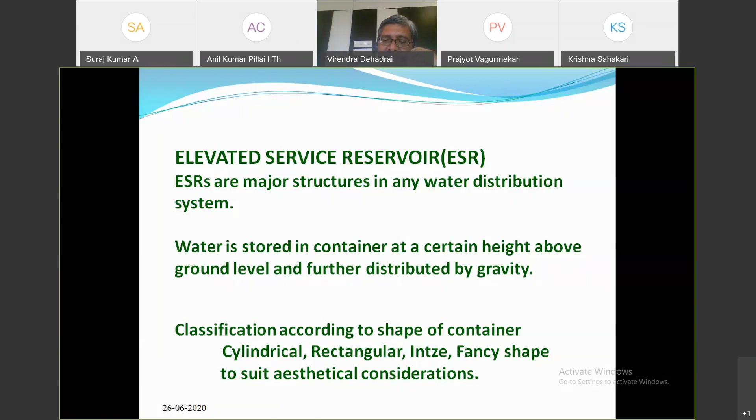The classification of the ESR is done mostly on the shape of the container, and the shapes can be cylindrical, rectangular, Intze type shape, which is a geometrically very efficient shape to dissipate hydrostatic pressures, and fancy shaped ESRs, which are there to suit aesthetical considerations.

ESR has three distinct elements: the container to store water, the staging to support the container at the required elevation, and the foundation to transfer the load to the ground. Of course, each element demands different analysis and design considerations to suit its functional requirement.

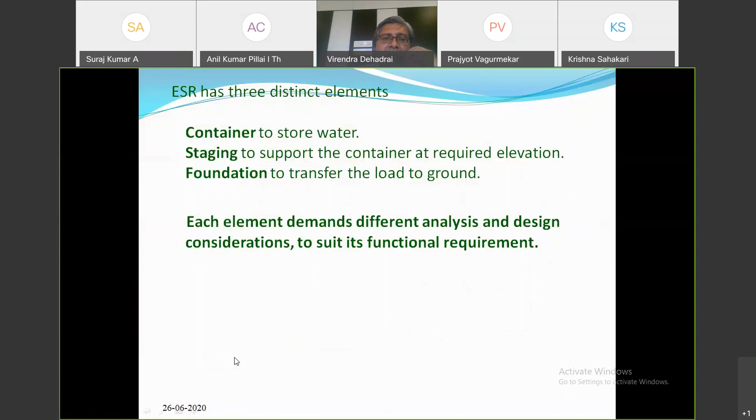The container is usually cylindrical or Intze type and will have the following members. For cylindrical tanks, a cylindrical wall connected at top by a roof slab and at bottom by a base slab. In Intze type, it's a roof dome with a cylindrical wall, conical shell, base beam or slab, bottom beam, and ring beams.

The members of cylindrical and Intze type containers can be classified as thin shells subjected to axisymmetric load due to water inside the container. Hence they are predominantly subjected to in-plane forces and can be analyzed by membrane theory. But this membrane theory creates discontinuity at the joints, and the compatibility at the joints can be achieved by applying bending theory of shells near joints. This continuity analysis has been very well explained in the textbook of Jain and Jaikrishna, and in a series of papers by Dr. Arya in ICJ.

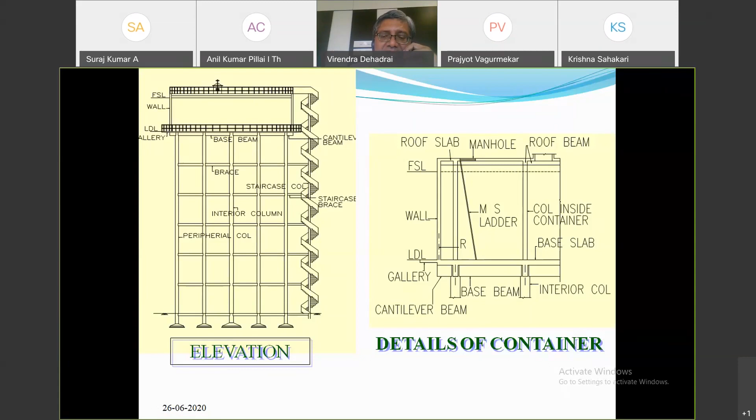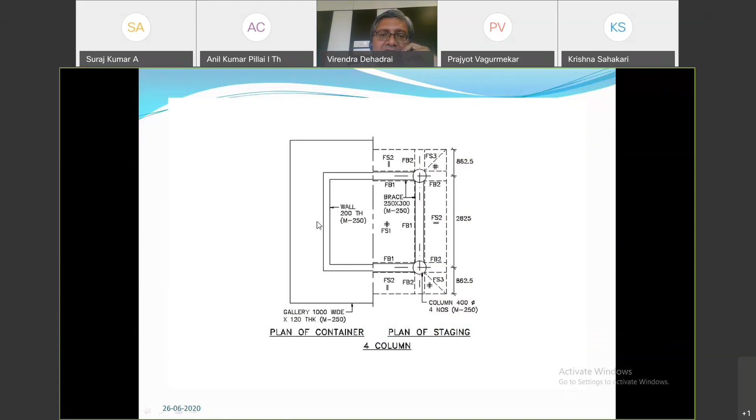This is typical 4 column ESR, and container can be square or circular, spanning on these 4 columns. Then this is 5 column configuration. Then 9 column configuration, wherein you will have container resting on a cantilever beam.

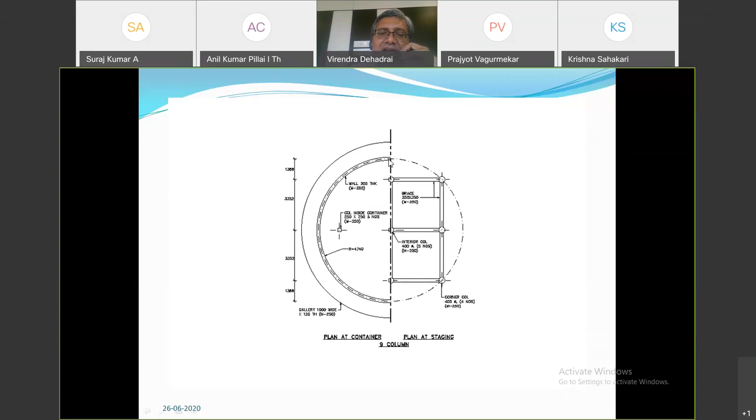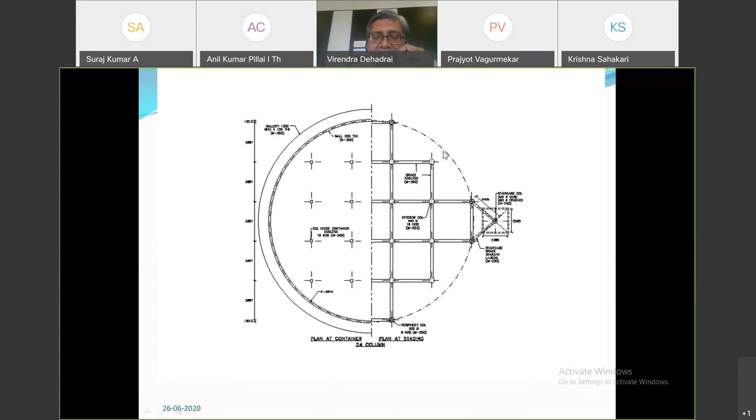This is 12 column configuration, 21 column configuration, 24 column configuration. Here also there will be cantilevers on which the cylinder will rest. Then 37 column configuration and 51 column configuration, and you can go on adding the panels to suit the construction.

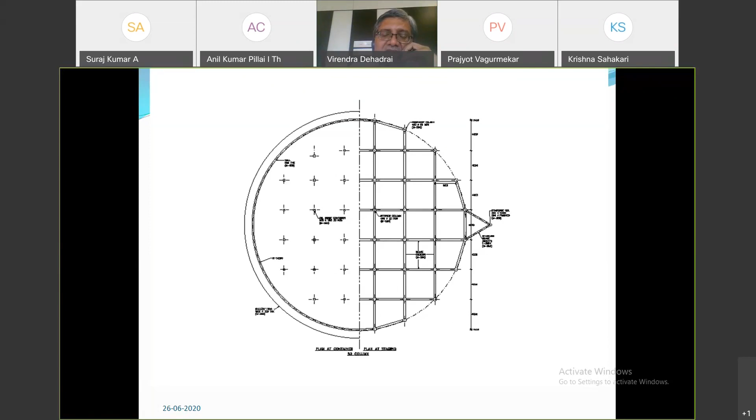So this has become one of the most popular type of ESRs, at least in Maharashtra, because the construction is much more simpler and the formwork requirement is considerably less as compared to the shell elements or Intze type of ESRs.

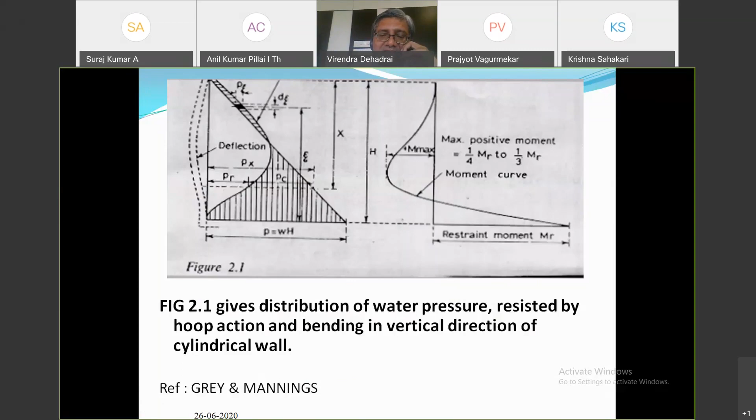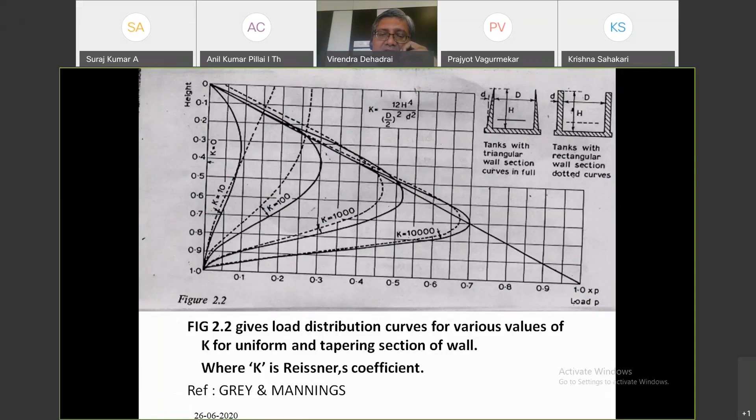And this is as given by, as already considered by Dr. R.K. Ingre, the tanks with triangular sections and uniform sections. The curves are available for the hoop in the section.

More economy in the design can be achieved using finite element method or finite strip method. Finite element method is well known and well established. And for the axisymmetric configuration of the ESRs, because of axisymmetric geometry and axisymmetric loads, we can use axisymmetric shell elements.

Wherein the wall is assumed hinged at bottom and top, and the axisymmetric water load is applied, results in the form of hoop force and bending moments in the wall can be found out, and the reaction at top and bottom hinge transferred to roof and bottom slab respectively.

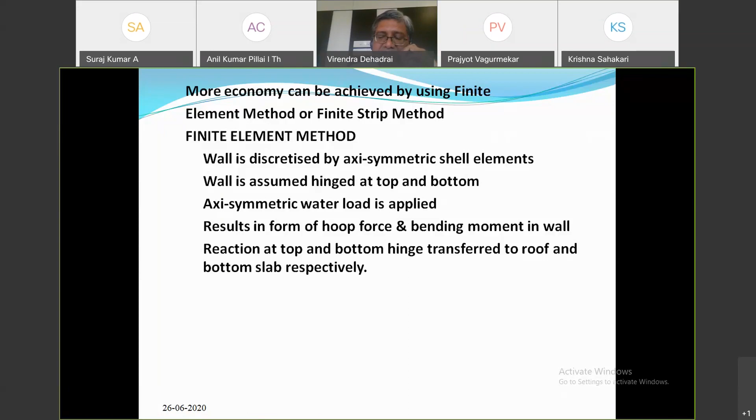This is the typical section. I am not really aware of any professional software which gives the axisymmetric shell element, but students can always find it in a very good book on finite element programming by Hinton and Owen.

There is another method called finite strip method, wherein the container is discretized by circular rings of unit height and subjected to hoop force due to water, to get the hoop force and bending moment.

The details, this method, because of the advent of new softwares, this is not popular, but for very complicated structures, still this can be used. And you can get the reference of this method in the book by Y.K. Cheung.

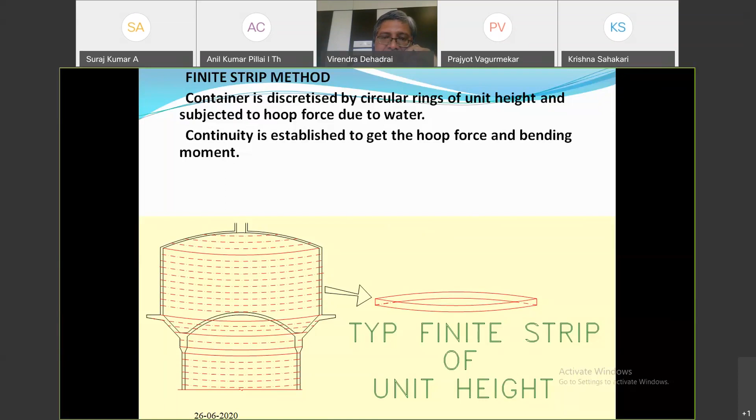As already told by Dr. R.K. Ingre, one of the most powerful methods for design engineers for analysis of axisymmetric containers is the analysis by BEF, or beams on elastic foundation analogy. And in addition to that, or improvisation on that, is the frame analogy method, which is still more suitable for design engineers.

Behavior of cylindrical wall can be modeled by considering the axisymmetric beam element resting on elastic foundation, whose stiffness is given by K is equal to Et upon R square, where E is the elastic modulus for the wall section, t is the thickness of wall, and R is the radius of the wall.

This continuous elastic foundation system can be replaced by a discrete system of tank wall divided into number of vertical beam elements whose connecting nodes are supported by lateral pin-ended struts. These are the beam elements whose moments are released at both ends. And the area and the length of these struts can be found out by the formula, which we will come to afterwards. But if we keep the length of these struts same, then only area of these struts needs to be changed, and that becomes easier. And also for design engineers, it is easier to deal with beam elements rather than the spring elements.

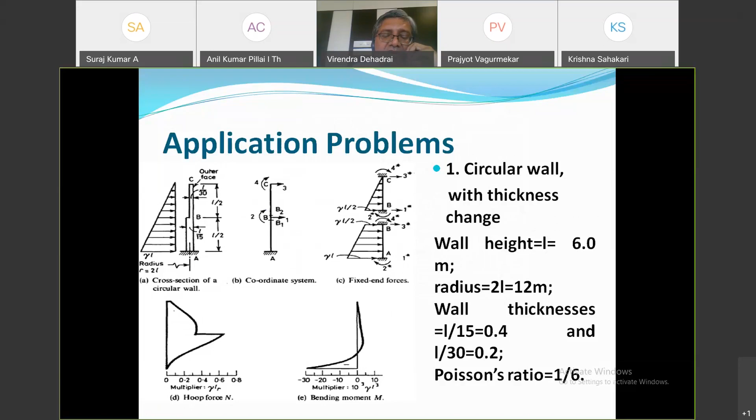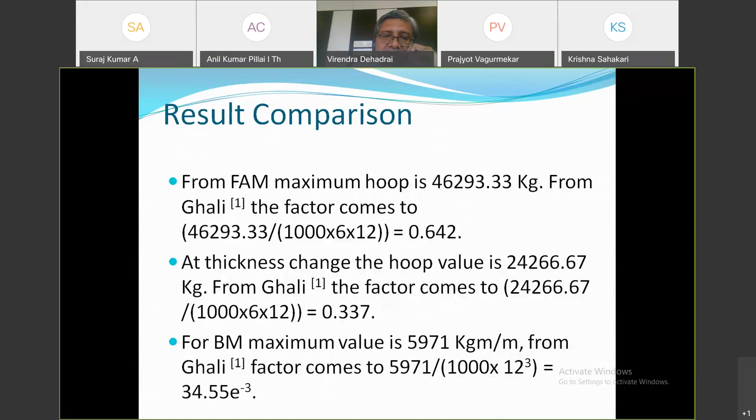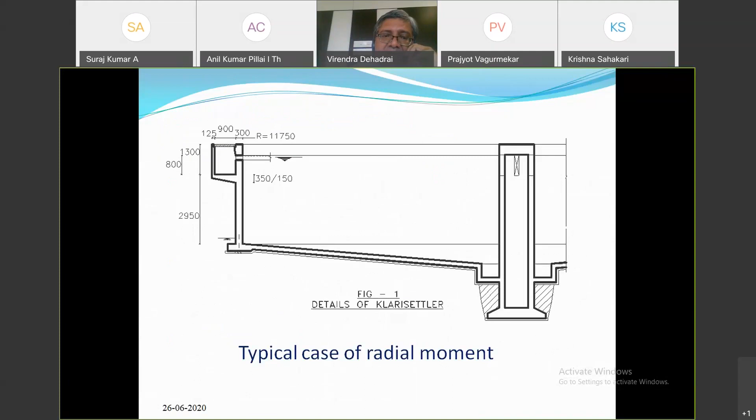Give me a few moments.

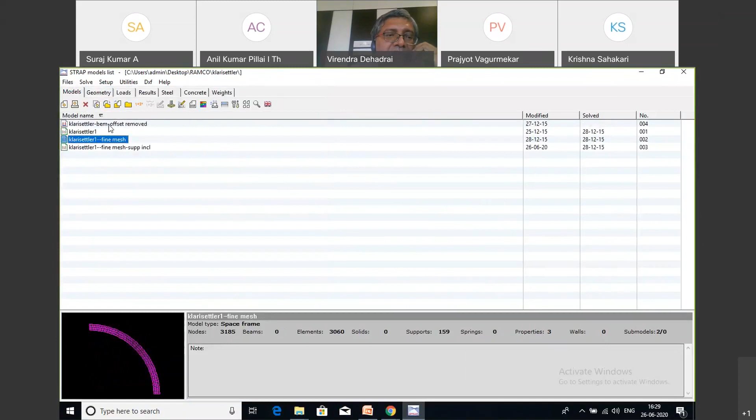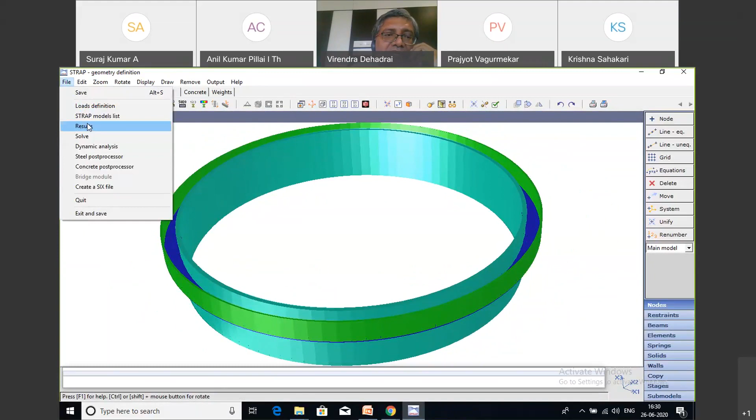So this is the 3D model of the structure, and because of the axisymmetry, we can reduce this to only a quadrant and do better analysis by considering only the quadrant of the structure like this. Only a quadrant. Now, here, because of symmetry, what you have to do is to provide restraint conditions so that symmetry is achieved. And the easiest way to do the restraint system is to consider this is x1 direction, this is x2 direction, and perpendicular to screen in upward direction is the x3 direction.

So to consider a symmetry at this plane, x1 displacement is possible, because if on one side of symmetry there is 10 mm displacement, then on the other side 10 mm displacement is possible. So x1 need not be restrained. Then x2, this horizontal direction movement. To achieve the symmetry, if this x2 is say 5 centimeter, x2 here cannot be minus 5 centimeter because of compatibility. So you have to restrain the movement in x2 direction. x3 direction is possible because if the movement is top 10 mm, then movement on the other side of symmetry of 10 mm is possible.

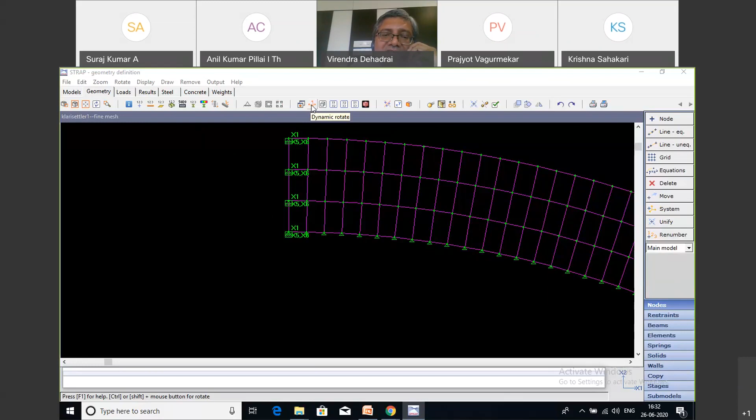Now, if we consider the moment about x1 direction like this, this moment is not possible, because by symmetry, if this is x moment, this will be minus x moment. In short, this will be fixed for this type of moment condition. So if you do this type of constraint system, we can simulate the full geometry by considering only the part geometry. And instead of doing all these things, what you can simply do is to provide a FEM model where this beam element is of unit thickness of wall thickness, and these struts you can see here.

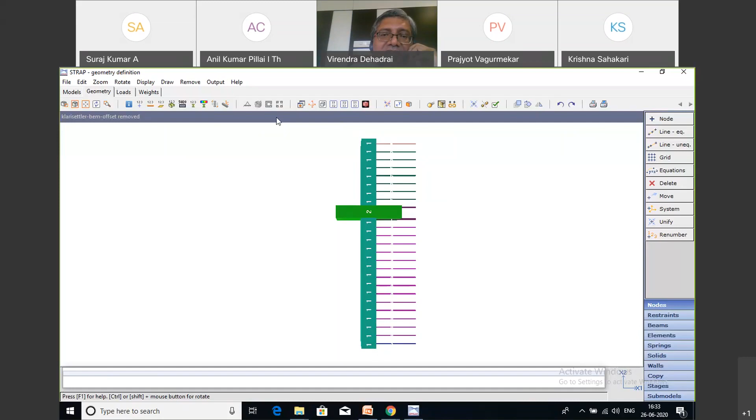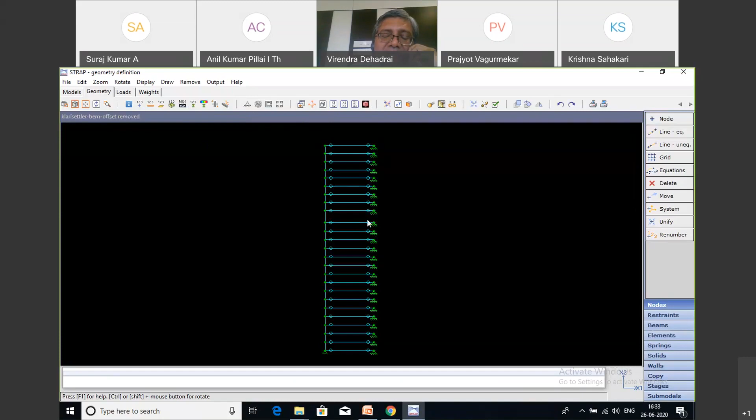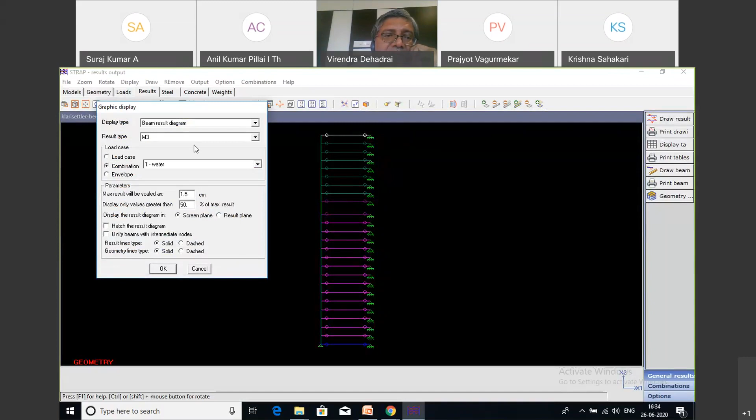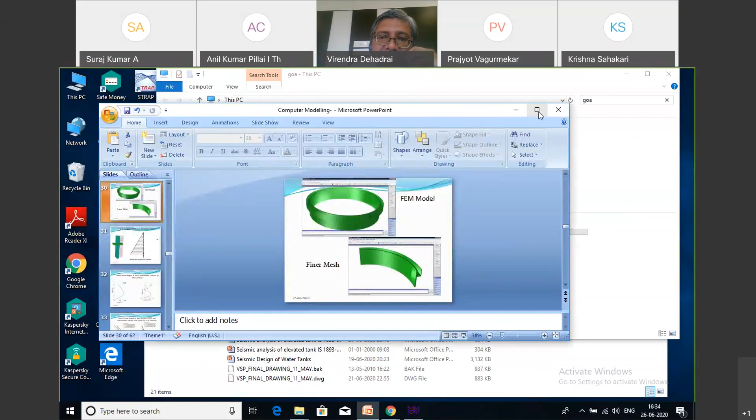For the unit strip, if you solve it, you can straight away get the bending moment in the wall this way. And the hoop in the wall can be found by the expression hoop is equal to Et upon R. I will show the calculation of hoop. From the displacement, you can calculate the hoop by this equation: Et upon R into displacement will give you the hoop in the wall.

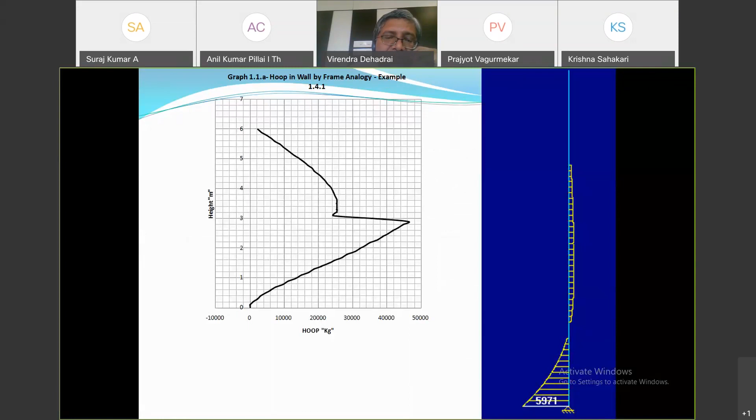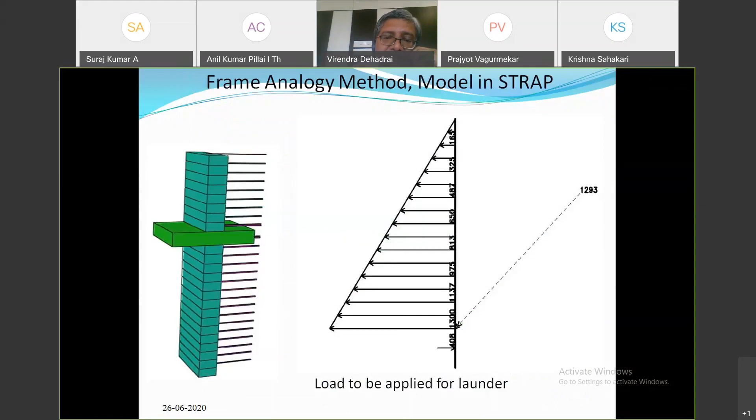So this is a very simple method for analysis of any type of axisymmetric container with a simple plane frame analysis package. These are the results which are already discussed. So I will urge all engineers, design engineers and students to use this very simple method, which can be employed by simple frame element software, which will give you the analysis of any complicated axisymmetric container.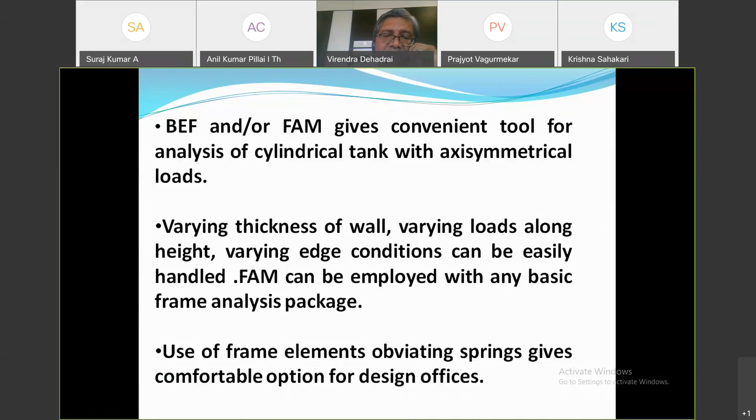Now this rectangular type of container will have the following members: roof slabs and beams, rectangular wall panels bounded by vertical beams, slab and base beams. Size in plan is usually kept to 3 to 4.5 meters from the view of construction ease, and depth of water from 3 to 5 meters. Roof slab and base slab panels are considered as rectangular interior panels subjected to uniformly distributed load due to self-weight, water and live load. Wall panels are typically rectangular panels subjected to hydrostatic loads due to water, for which the coefficients are given in IS 3370 or Reynolds handbook.

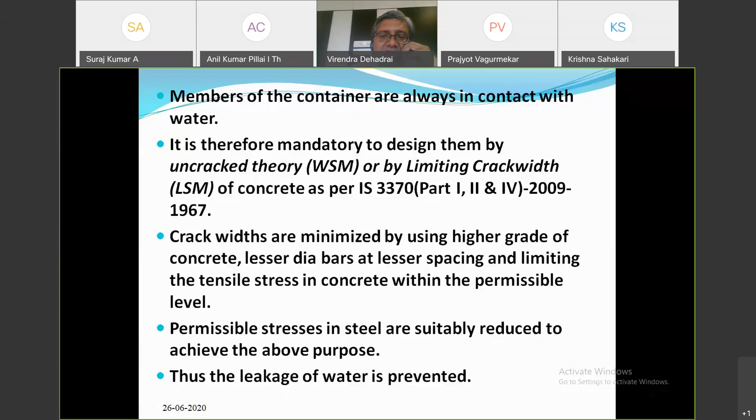This is the vibration of liquid in tanks after Housner in 1963. Before IS 1893-2002, the earlier IS code 1893-1984 used to consider only a single degree of freedom system. As explained earlier by Dr. R.K. Ingle and Jain sir, the container can be divided into two masses, one impulsive mass which vibrates with the container, and another convective mass. This creates the 2 degree of freedom structure for the ESR.

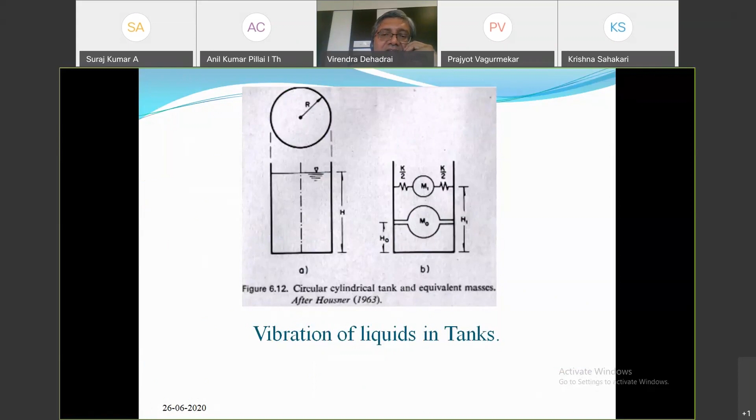But earlier we used to consider everything as impulsive mass, and now also IS 1893 allows the consideration of a single mass system for tanks up to 1000 meter cube of capacity. So up to 10 lakh liters of capacity, we can use single degree of freedom, but it is always better to go for the 2 degrees of freedom system given by Housner, and the formulation is also adopted in our IS code 1893.

So the main computer application comes in the analysis of the staging. This can be a skeletal structure formed by columns and braces. This system is highly indeterminate and can withstand a large amount of vertical load due to dead load, live load, and water load, together with horizontal forces due to wind or seismic effect. The cylindrical shaft has also been popular, but in Maharashtra, for Maharashtra Jeevan Pradhikaran tanks, we are not using shafts now. It is very good if slip form shuttering is used. Otherwise, this thin shell structure is highly susceptible to local axial buckling.

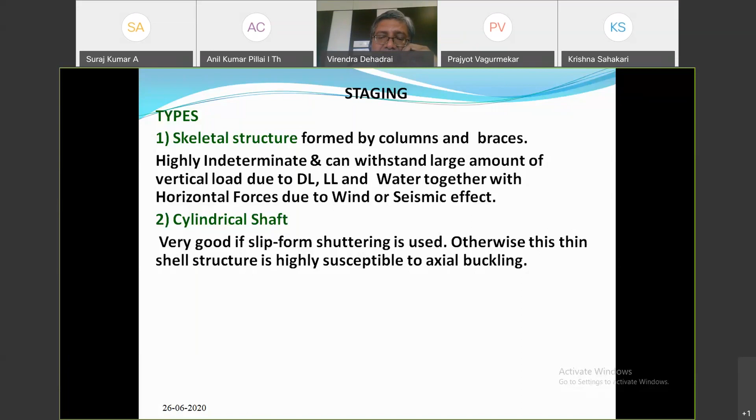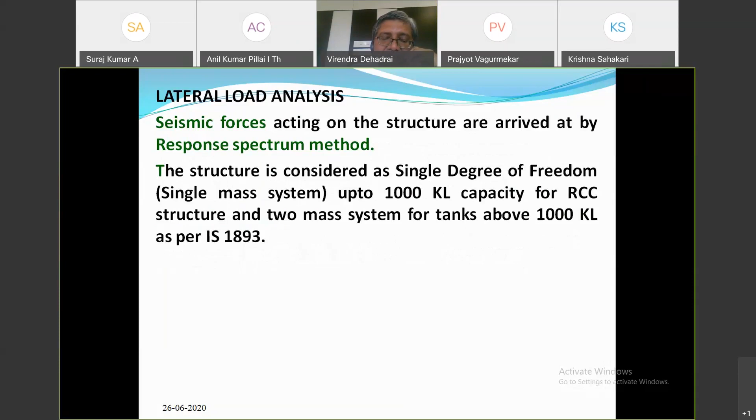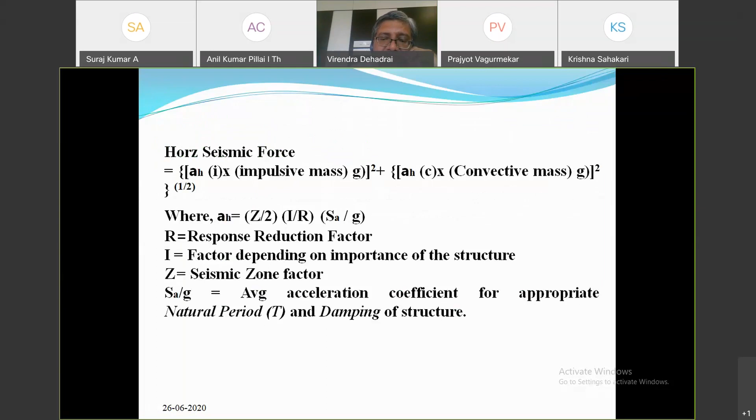For the lateral load analysis, the seismic forces are arrived at by the response spectrum method, considering a one mass system up to 1000 KL capacity of ESR structures and a two mass system for tanks above 1000 KL. For the two mass system, the force is unified considering the base shear due to impulsive mass and convective mass. Equivalent horizontal seismic force is calculated by the square root of sum of squares method, and this horizontal force can be applied to the ESR staging structure. Damping of RCC staging is 5% of critical damping now, and the vertical seismic coefficient is 2/3 of the horizontal.

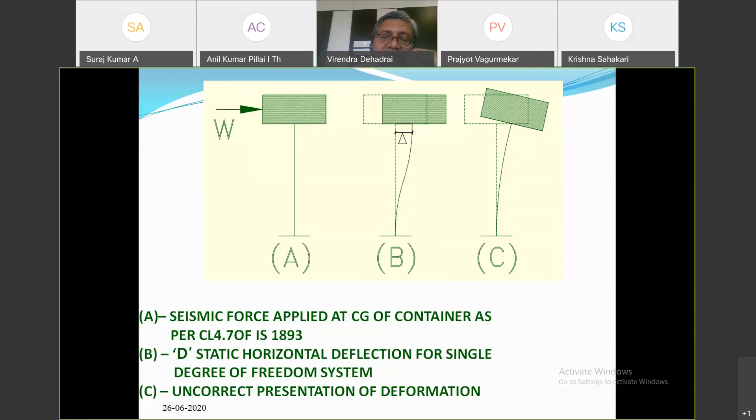Now, what do you mean by a single degree of freedom system? It implies that the tank will deflect as per stage B, like this, and not as per stage C. This deflection delta is then used for getting the response of the ESR by the response spectrum method, with predominant mode time period T equal to 2 pi root delta by g, where delta is the deflection at the top of staging due to application of load equivalent to the weight of container and water and 1/3 weight of staging. And as Dr. Ingle said, if the ESR is squat, then we have to consider 1/2 the weight of the staging.

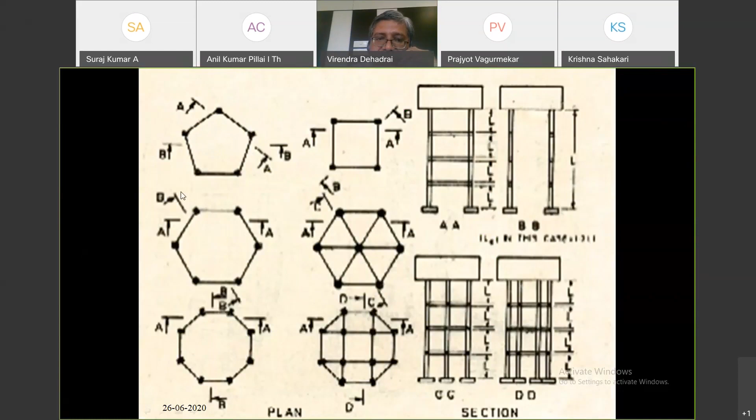For staging involving less number of columns, it is necessary to carry out 3D analysis of staging. And in small types of container, lateral force acting along the diagonal may be more severe. For large capacity, the whole exercise may not lead to significant change in value of design forces in columns and braces, even if 2D analysis is considered. This is strictly because the ESR is mostly axisymmetric and the loads are axisymmetrical. This need not be taken as a general statement.

So for a particular ESR, I will show you how the three types of analysis can be done for the staging. And of course, the wind force acting on the structures are also calculated as per IS 875 Part 3. And it has to be noted that seismic force and wind forces do not act simultaneously. So the design is carried out either for wind force or seismic force, whichever gives the critical forces in the columns and beam staging.

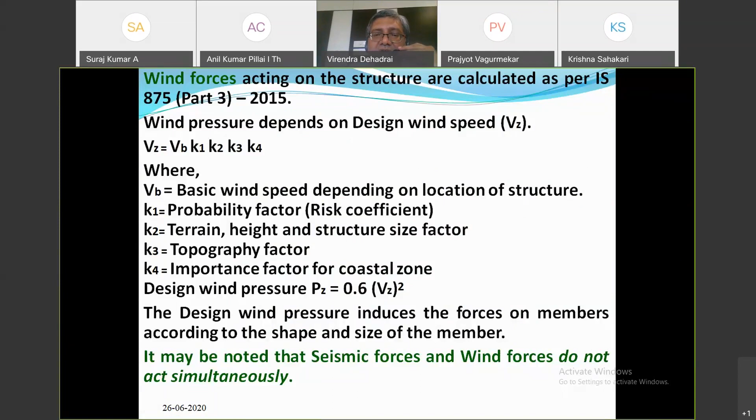So earlier, before the advent of computers, cantilever methods and portal methods of analysis were very popular. However, they give conservative solutions. With the advent of computers, more sophisticated procedures of stiffness methods have become popular. And many softwares are available in the market, such as STAAD, STRAP, ETABS, NISA, etc. And more sophistication is done by considering P-delta effect, which is now made mandatory by new IS 1893, and finite size joint corrections and shear deformation of the joints.

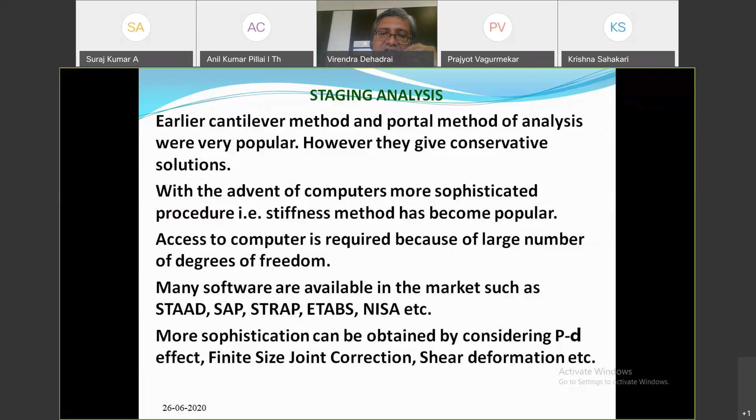P-delta effect is particularly required if the stability index S is more than 1, and as told by Dr. R.K. Ingre yesterday, finite size joint correction increases stiffness of the structure, altering its time period, and the time period can be given by this formulation. This is already dealt with by Dr. R.K. Ingre yesterday.

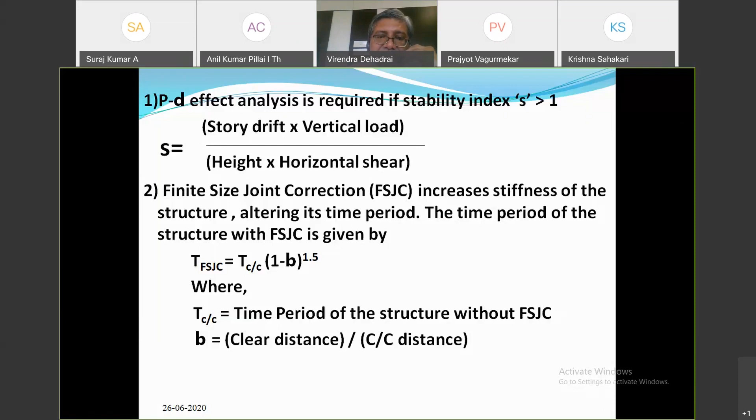So for this typical ESR structure, the analysis can be done by considering a single 2D frame, which I will show. Instead of considering 3D, we can consider the 2D frame. Herein, the load of container is considered only on a representative 2D frame by considering the stiffness contribution of this frame. So the summation of I of all these columns of this frame divided by summation of stiffness of all the columns, into the load applied, will give you the load on this frame.

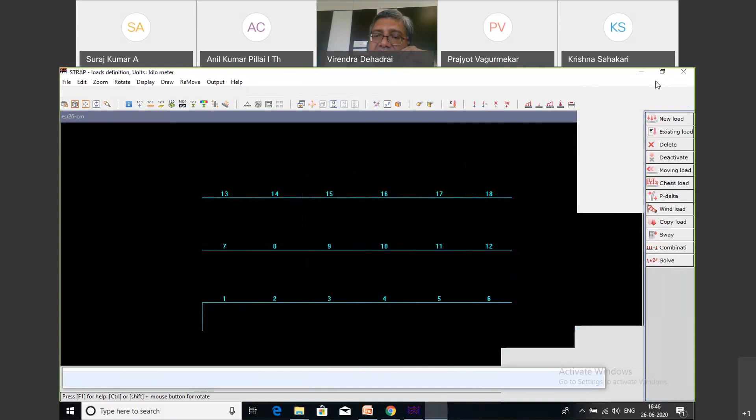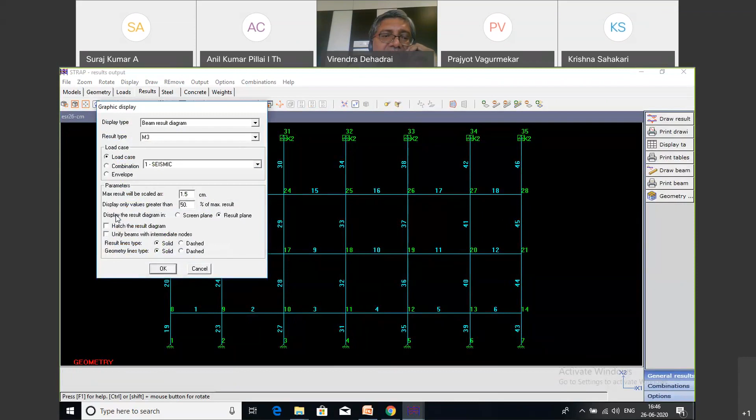So for unit load, this can be horizontal load. This type of horizontal load can be applied, and simple frame analysis can be done to get the moments and forces in the structure. And as told yesterday by Dr. R.K. Ingre, what we have done here is to consider that this is a single degree of freedom system. This condition can be achieved by applying the fixed roller at the top, so that this frame will move only laterally and will be actually as per sketch B we discussed earlier.

And also because of the diaphragm available of uncracked base beam and base slab, a rigid link can be provided between these elements, and this will give you the deflection of the ESR as we need for single degree of freedom system. So this type of deflection of the system we will get because of restraint applied at the top to simulate the behavior of the staging of the structure.

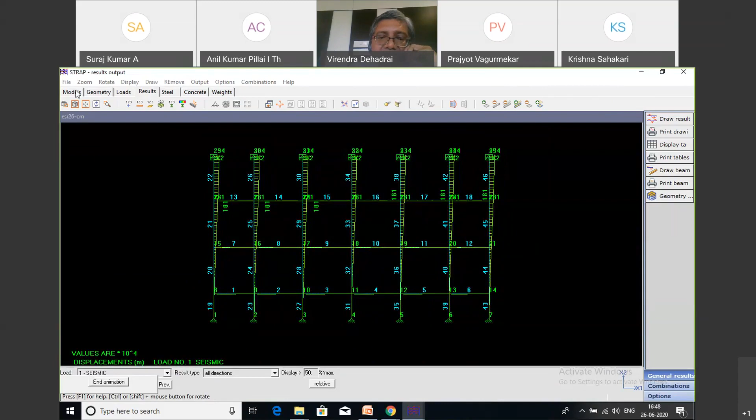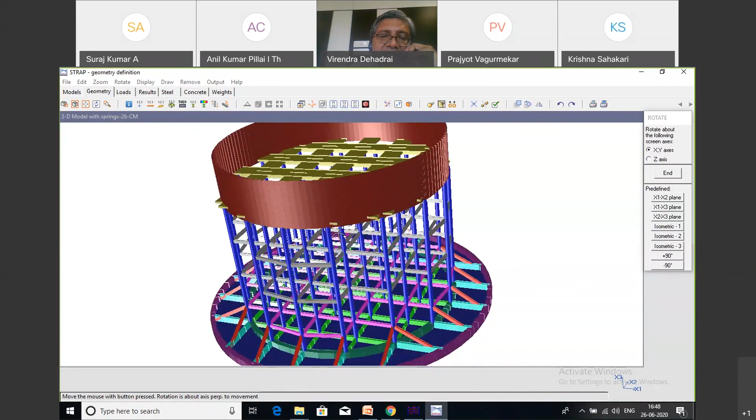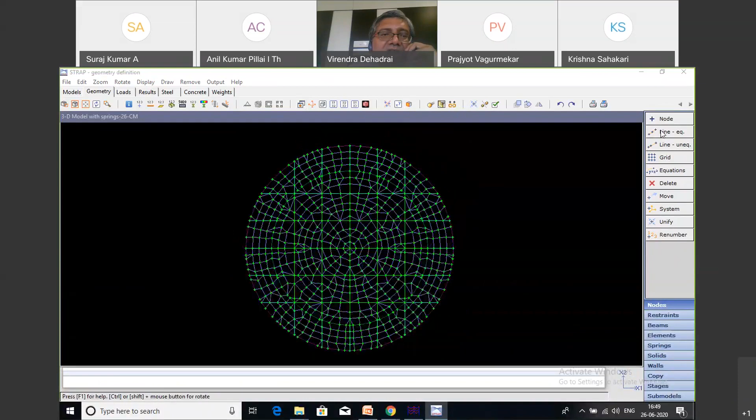Now, we can further do the sophistication by considering the base beams and the container wall of the structure, and this type of 3D model can also be developed. And here a raft can also be modeled, and its soil structure interaction can be considered by putting up the springs.

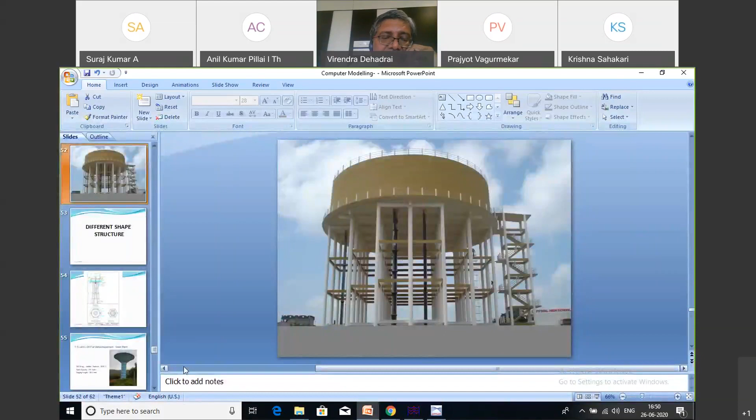The stiffness K of the soil for soil structure interaction can be obtained from the geotechnical engineer or from Bowles' equation for the stiffness of the springs, based on the bearing capacity. So based on the severity or importance of the structure, you can do the sophistication in the modeling of the structure.

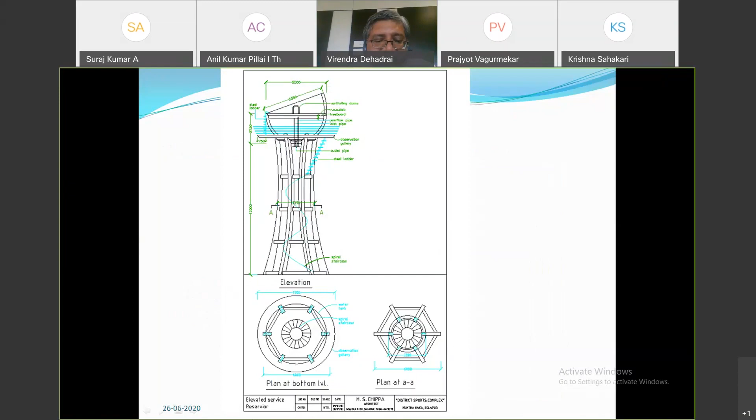Then I will consider some different types of structures which we have done, and the analysis which can be done for this type of ESR. This is a small capacity ESR of the World Cup shape in Solapur at the stadium. So here, this being a very small capacity, what we did was we analyzed the sphere separately.

Again, by considering symmetry, we have analyzed only half portion of the sphere, and then the staging can be modeled as per the shape of the, because this shape was odd, we have to reconfirm it with the 3D analysis.

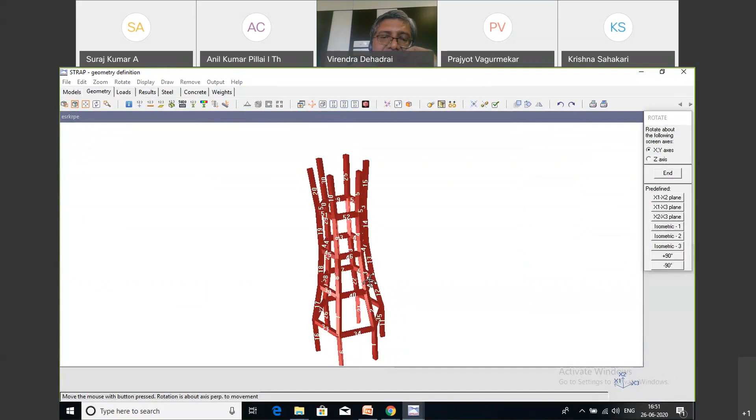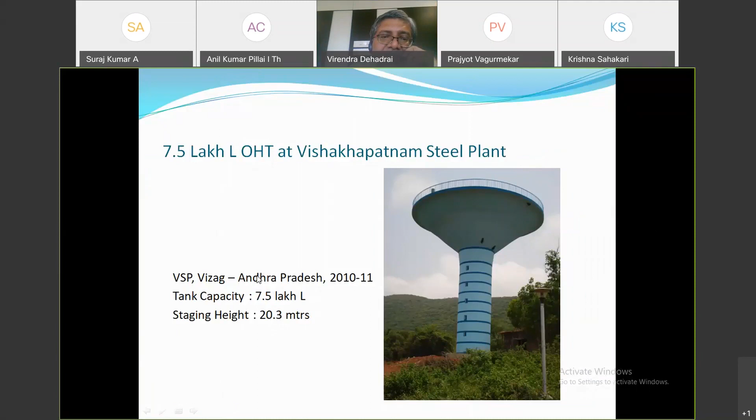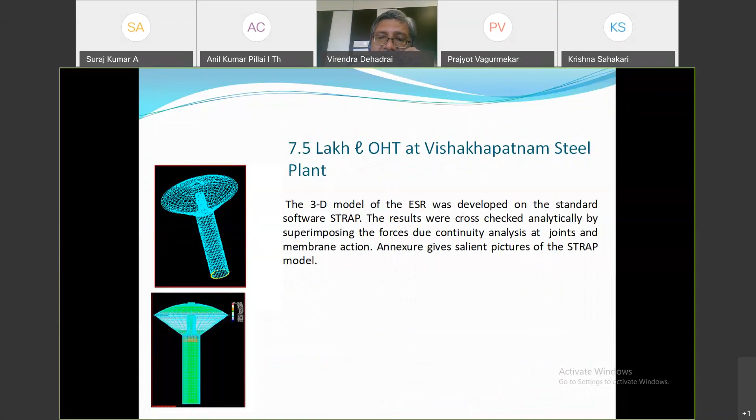And this is another ESR of around 7.5 lakh liters capacity. This was also analyzed by preparing 3D model of the ESR, as well as the results were cross-checked analytically by superimposing the forces due to continuity at joints and membrane action. And I'll show you the 3D model also, which we have done for this.

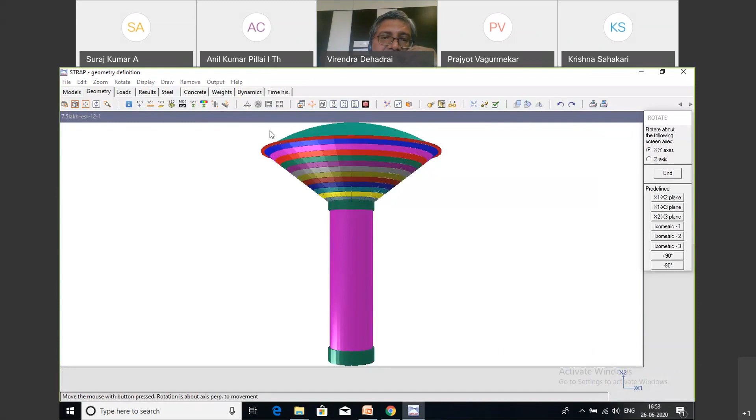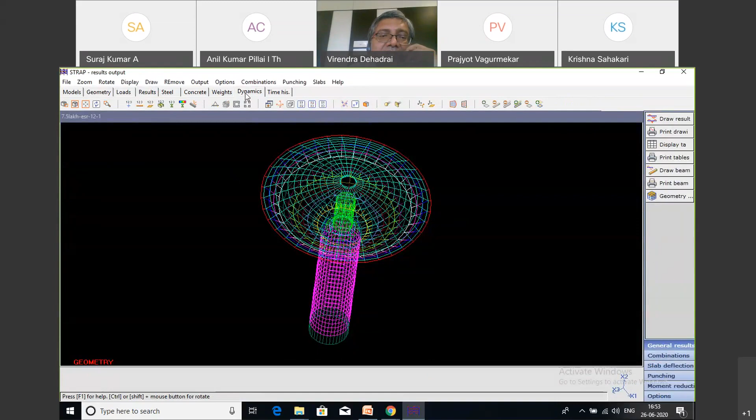So before preparing the final 3D model, because then, so this was the model which was prepared. You can see here the varying thickness of the shell, conical shell was modeled by different thicknesses with the opening, and the results were cross-checked with the analytical model. Yes, I will show you the response spectrum analysis done for this.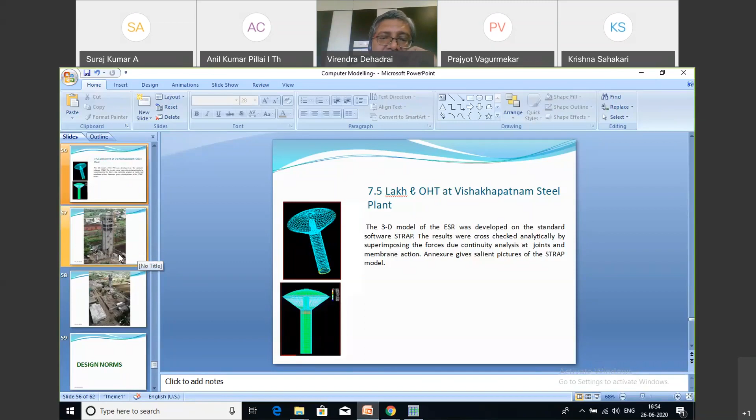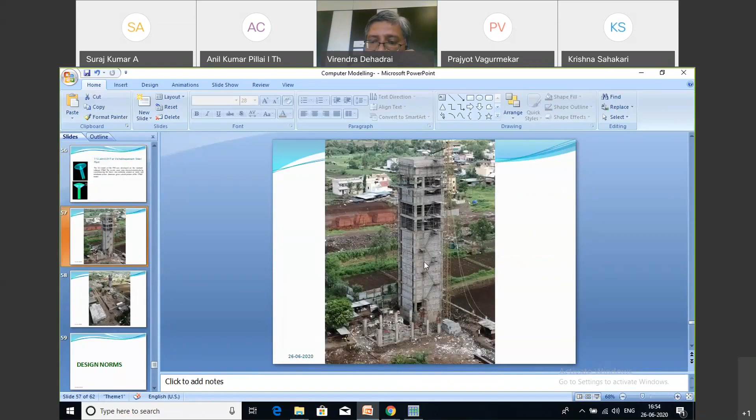This is another ESR under construction at, this is a very small capacity ESR, but of huge height. This is almost 35 meters height, and this cannot be considered as a typical ESR, because the ESR usually acts as an inverted pendulum because of large weight of container and water stored at this location, and relatively very flexible staging. But such type of modeling is not correct for this type of ESR.

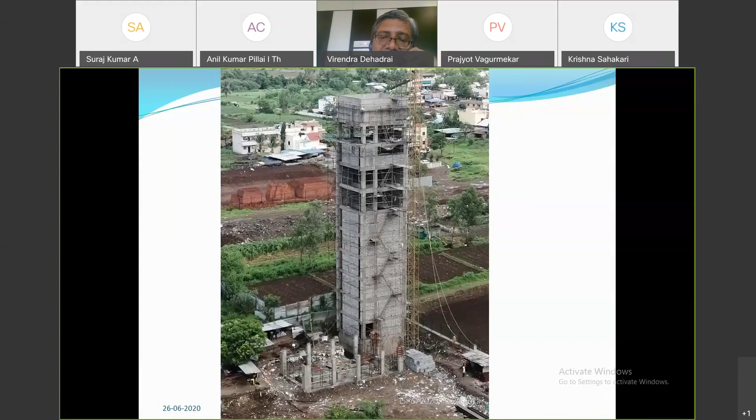So a full scale model needs to be developed, and not only the seismic analysis, but also you have to use gust factor method to get the idea of the dynamic wind forces as given in IS 875 part 3. So I have some of the figures for this ETABS analysis done by us for this ESR.

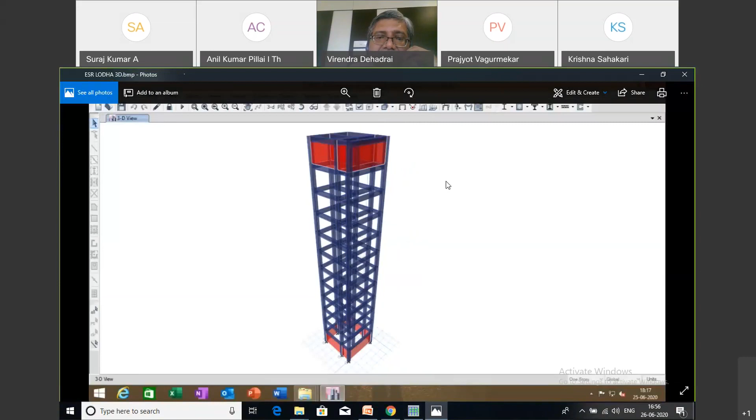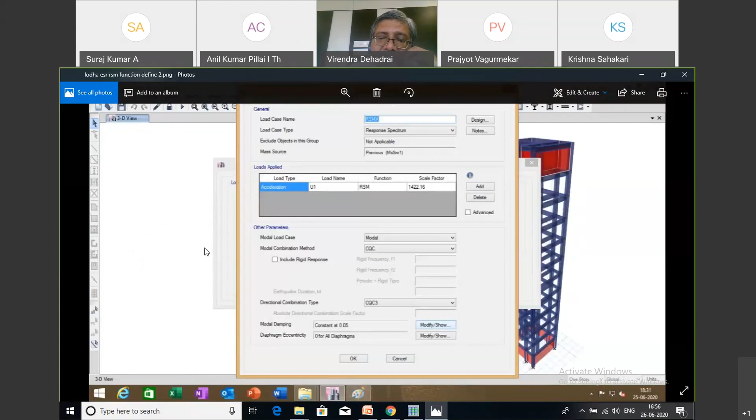So this was the ETABS model developed. This is the elevation. These are the dynamic wind loads applied. These are the combinations made: earthquake in X and Y direction and wind in X and Y direction. And the design was carried out with this design. And of course the base shear was amplified based on the static coefficient method. So this type of analysis can be carried out for such typical structures.

Like in Maharashtra, maximum capacity of ESR can be 20 lakh liters and minimum is 25,000 liters. You have to use container for M30 grade. Minimum thickness 100 mm for roof dome, which is practically not possible because of new IS 3370, where 45 mm cover is required. So 45, 45, 90 plus 2 of 8 tor bars, even if we provide, then it's 16. So minimum thickness of 120 mm should be there.

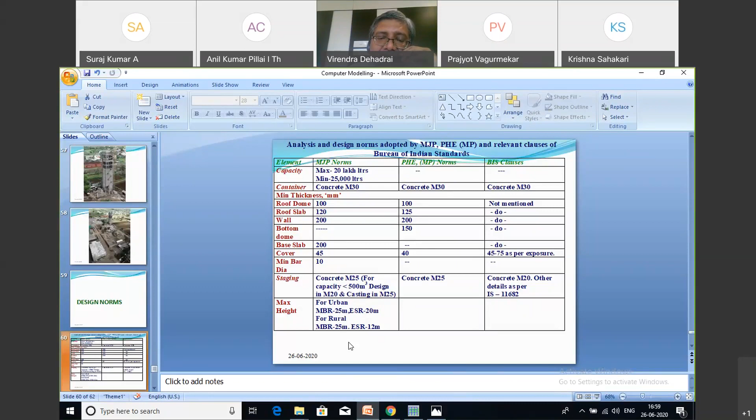Then maximum height 20 meters for elevated service reservoirs, and 25 meters for MBR. And for rural, the maximum height of ESR is restricted to 12 m. Then the minimum size of column, even this has come into new IS 1893 also. Minimum dimension of column for any ESR having capacity more than 2 lakh liters has to be 400 mm. Below that, it can be 300 mm.

And square columns are disallowed. That is because in ESRs, there are no diaphragm slabs. So with circular column, only checking of plumb is sufficient. You don't need to check the orientation of the formwork or the shuttering for the ESR column. Then brace sizes minimum 250 width as in Maharashtra, and as per IS 13920 minimum 200. Cover is 25, but with exposure condition now it is minimum 30 mm.

Maximum center to center distance of brace as per IS 11682 is 6 meters, but in MJP for capacity of ESRs less than 5 lakh liters, you cannot go for the brace distance more than 4.5 meters. Cylindrical shafts are not allowed in Maharashtra and MP, and of course IS does allow it.

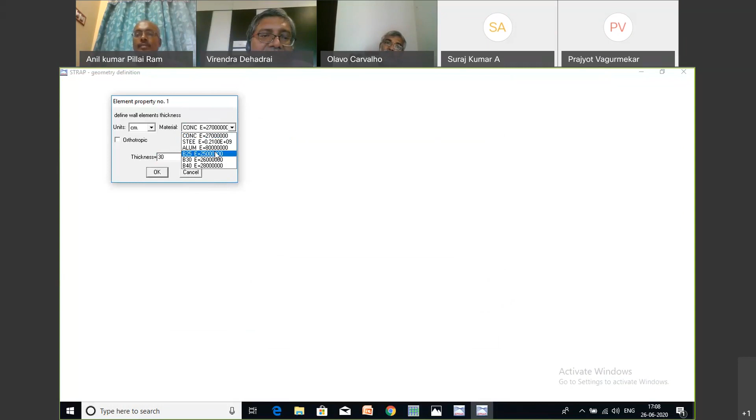There's an advantage of using this, it's available with most of the software. I'll take a circular tank with no bottom, radius of 10 meters, height of 10 meters, thickness around 30 centimeters, and concrete M30. I'll skip pressure for now, we will do it afterwards.

So this tank is done. You can apply the restraints. We will consider a pin at the bottom.

The main loads on the wall are the hydrostatic loads, so I'll apply only that load. This is available in Strap, but a similar procedure can be adopted for many software, they are all almost the same. Here you select linear, the load is varying.

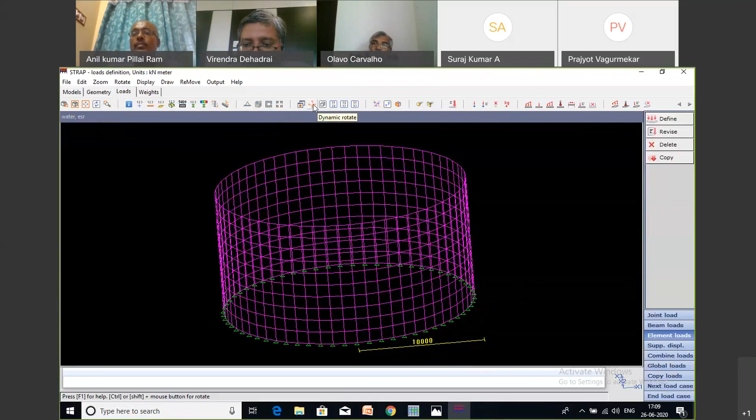I'll show you the axis. You can see the vertically up axis is X3, so the load varies linearly in the global X3 direction. We will apply it in the local direction because here the global direction changes everywhere.

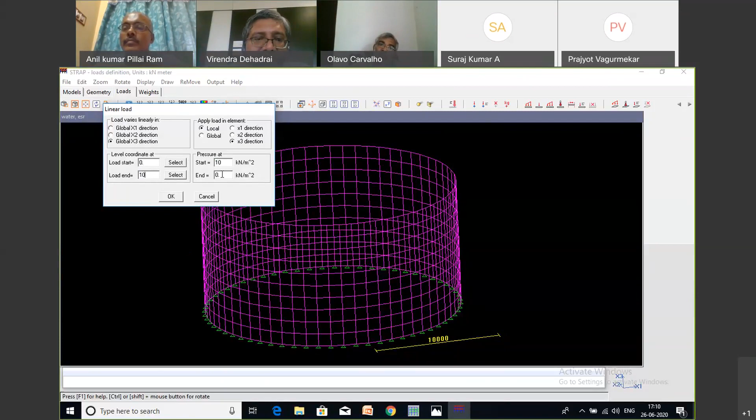Load at start, the bottom level is 0 meters. At 0 meters, we apply a load of say 10 kilonewtons per meter square, and at the top, say 10 meters, we apply 0 for water load. So we select all the elements, and this type of load gets applied. This is the major load for water tanks. So this is how simple it is in new software.

And of course, if you want to use axisymmetric shell elements, there is an excellent book by Hinton and Owen on finite element programming, which gives the axisymmetric shell element.

I hope this gives the basics of how to apply the hydrostatic load, which is the most important load.

Anil Kumar, yes, can we go to the next question sir? Yeah, in fact a question from Mr. Chidambara Nagaraju is asking about seismic lump mass for liquid loads and solid loads. Is there any difference since it is an inverted pendulum action?

No, it is the same. It is the same. You consider water also as a dead load. That is, for all the analysis, water is considered as dead load.

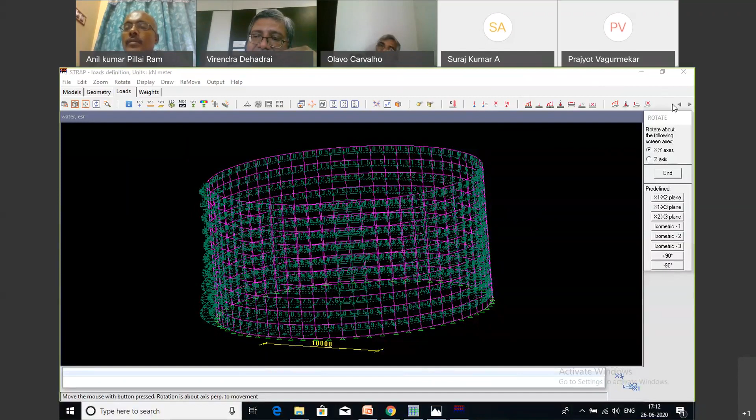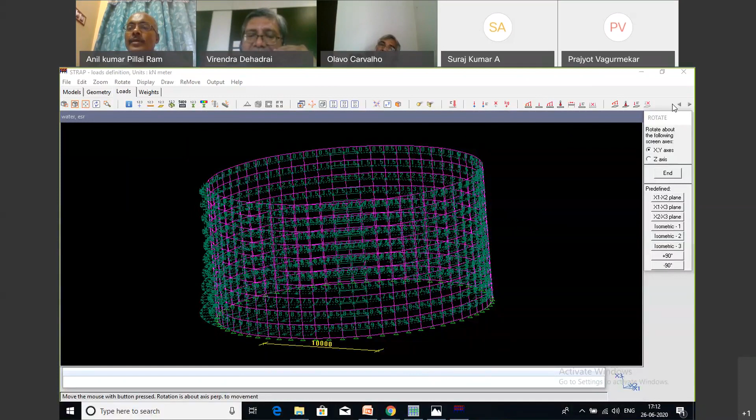Another question is how to apply hydrostatic pressure in STRAP software. I am not conversant with that software, but which software did you say, STRAP software? Yeah, STRAP, I showed you. Just now I showed you how to apply it. Okay, that's the same thing applies.